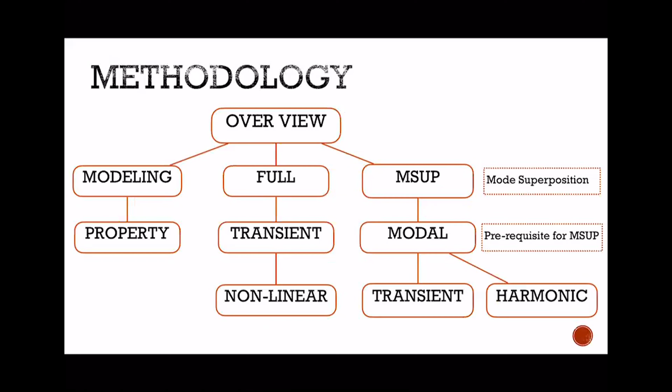The full method contains a nonlinear analysis of the statue-only model and the transient system, and the MSUP method contains modal analysis as the prerequisite of the transient system and the harmonic response analysis. Parametric studies were applied in both studies.

And then would be the modeling part. The modeling part is the process of building finer models based on Verdel's model. The picture here shows the Verdel's model are made up of coarse cuboid and overestimate the volume of the real one.

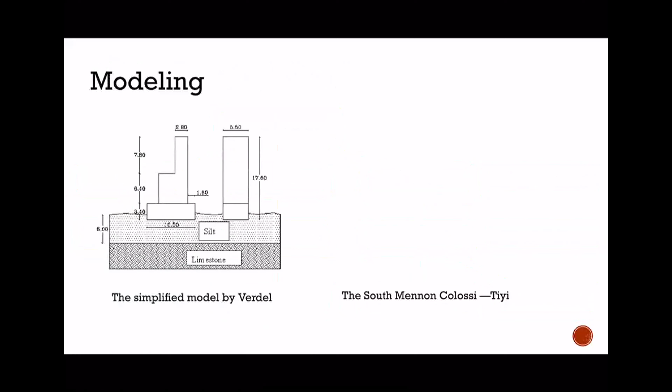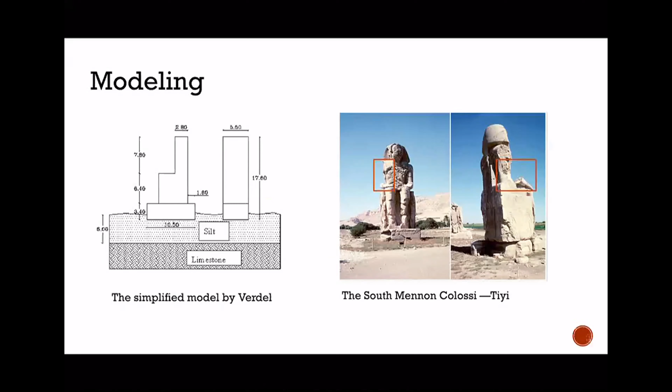After I observed the photograph of the real statue closely, parts of the statue are removed. You can see the red rectangle here. The right arm was removed, however the left arm remained. So I built a similar model to simulate the real one. The right arm is removed, and the left one remains. You can see the left shoulder here is a little bit wider than the right one.

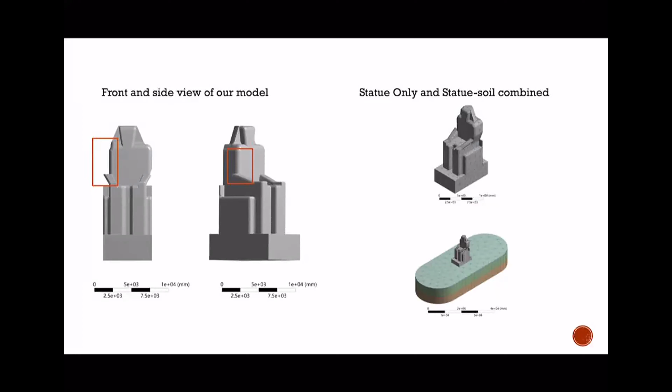Two models are built in order to make a comparison and to see the soil interaction on the statue, with the meshing size of 1000 millimeter. The statue calculation has its accuracy. The statue-soil combined model is divided into three parts, with the upper statue remaining the same. The lower part is composed of a 6m thick silt layer and a 5m thick limestone layer.

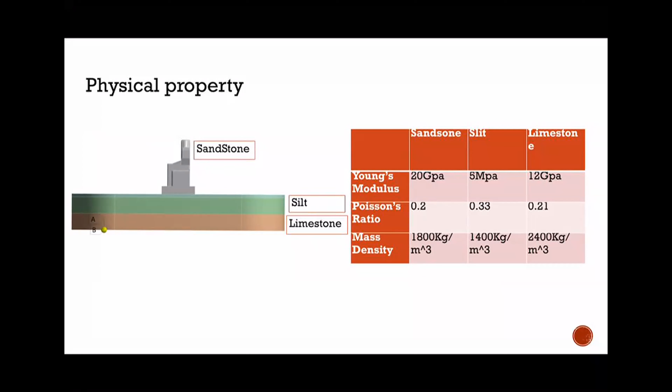Next part is the modal analysis. Modal analysis is used as a prerequisite to identify the natural mode of vibration. Each mode in the modal analysis refers to natural vibration characteristics of the mechanical structure, and each mode has its own specific natural frequency. The modal analysis aims to find the natural frequencies, which are the inherent properties of the structure. No load will be applied in the modal analysis process.

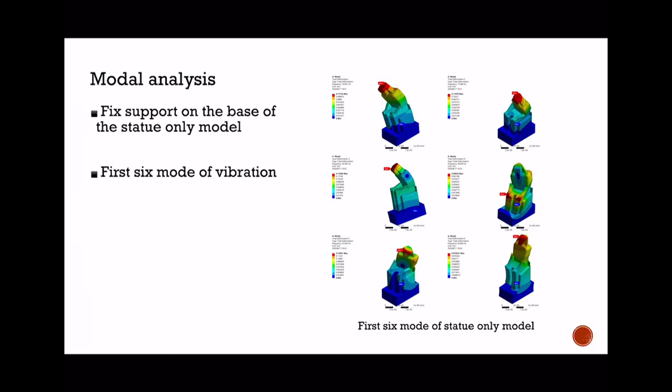Correspondingly, boundary conditions, like the fixed support in both cases, are applied at the bottom of the statue and the soil foundation. Here is the first 6 modes of vibration.

The next part will be the transient analysis in the MSUP system. Transient analysis contains a time domain, and we set the step end time for 2 seconds, with maximum substeps of 100 and minimum of 10.

For the boundary condition, we add a fixed support at the base, as well as frictionless support for the statue-soil combined model, and we add at the side of the soil to limit the freedom of 2 directions.

We're using the sinusoidal wave to simulate the real earthquake motion, and the fundamental wave is shown here: A sin(pi t).

We add the base excitation at the bottom of the statue. After that, we apply the parametric study to change the amplitude and frequency, as well as the direction, to see if there is any linear or nonlinear relationship.

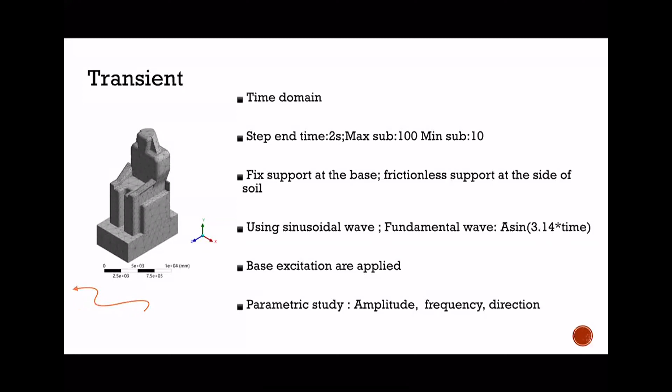The next part would be harmonic response analysis. Different from the transient analysis, it contains a frequency domain, and for the boundary condition, also the fixed support at the base. The minimum frequency just covers the first mode of the frequency, and the maximum frequency minus the minimum frequency is 1.5 times smaller than the interval of the modal analysis.

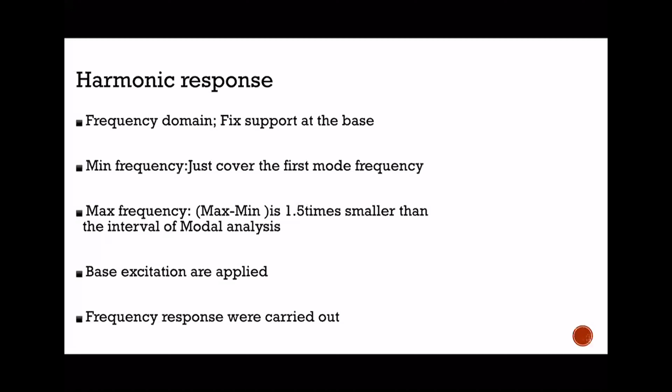Also the base excitation is applied at the base of the statue. And finally, the frequency response will be carried out to see the total deformation or stress given a frequency domain.

The final part is the transient analysis in the full system. In this analysis, we consider the nonlinear factor and also the elastic support between the statue and the base, with the stiffness of 100 Newton per cubic millimeter.

At the end, we will use the force convergence in the solution output to check whether the problem would converge. The next part would be the results and conclusion by Xiaokun.

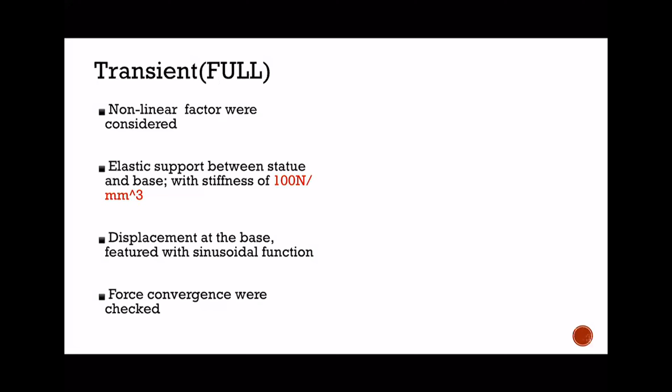Okay, so this is the results and conclusion part. For this modal part, I will show the first 6 modes of the statue-only structure and the comparison between the statue-soil combined structure. This guy here is a statue representing the statue-only structure, and this guy here is like a brick, representing the statue and soil combined structure.

In the transient analysis, we will show the results when we vary the statue's frequency, amplitude, and direction. We will do the same for the statue-soil combined structure and compare it with the statue-only structure. As for the harmonic response part, we want to see the response when the frequency changes, and whether it will blow up when the frequency of the displacement function approaches the natural frequency. The last part is the transient analysis, which will show the solution convergence and the sliding phenomena, as well as the comparison between full and MSUP system.

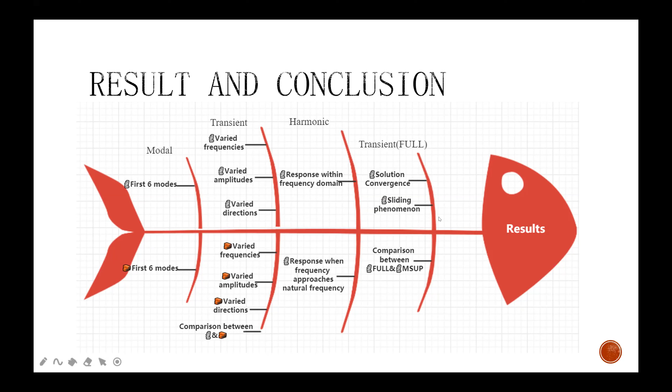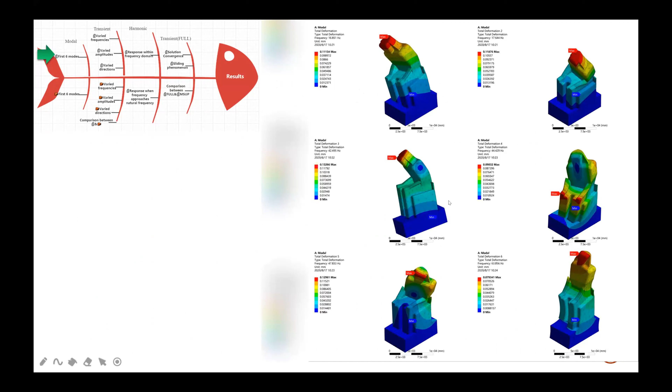So for the statue-only condition, we keep the first 6 modes. The first 3 modes, as you can see, are bended ones, the 4th and 5th are twisted ones, and the 6th is a stretched one. Each of them corresponds to a natural frequency.

This is the animation of the first modes of the statue, and also the first modes of the statue-soil combined. You can see they are pretty much alike, both bended. This is the 5th mode of the statue and the statue-soil - both twisted. And this is the 6th mode of the statue and the statue-soil combined - both stretched.

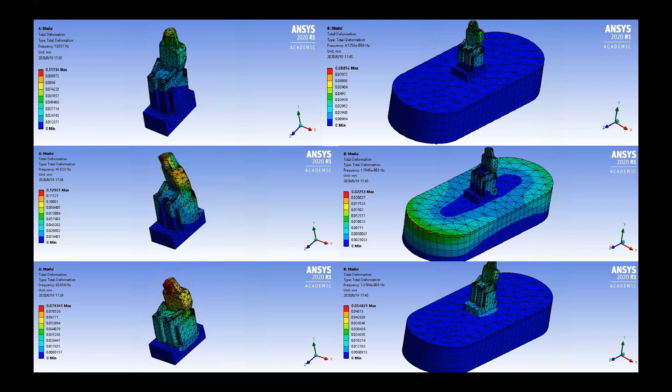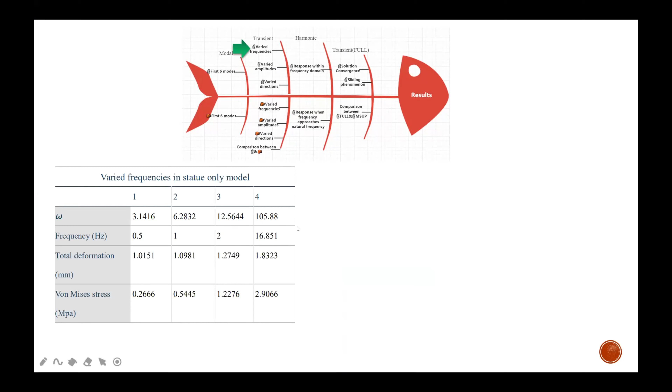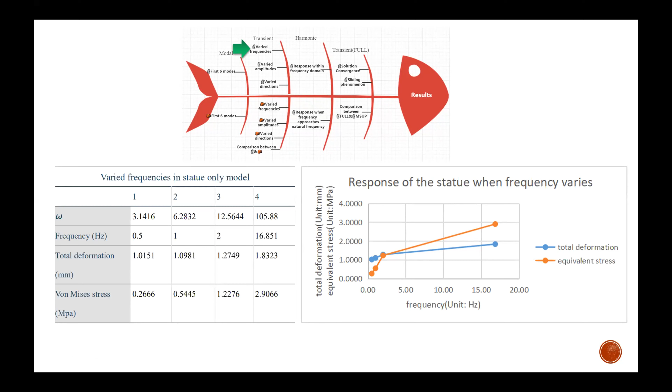This diagram shows that during the domain of 0.5 Hertz to 2 Hertz, as the function's frequency increases, the total deformation and equivalent stress of the sculpture increase in a linear-like trend. Though the total deformation and equivalent stress obtained from 16.851 Hertz did not conform with the slope before, it shows that the sculpture did not experience a blow-up as the frequency of the function approaches the natural frequency of the statue in this transient analysis.

This is the deformation contour when applying sin(pi*t) to the structure, and this is the animation.

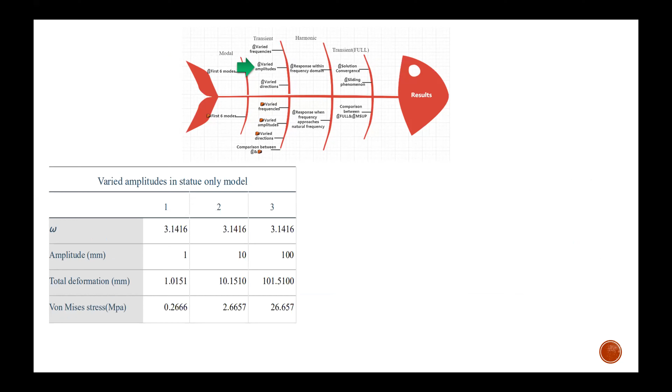Besides, we changed the amplitude of the displacement function from 1 to 100. The magnitude of stress and deformation on the statue are strictly proportional to the amplitude of the displacement function.

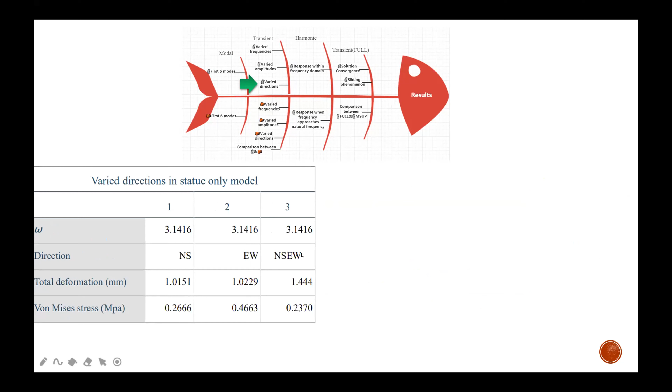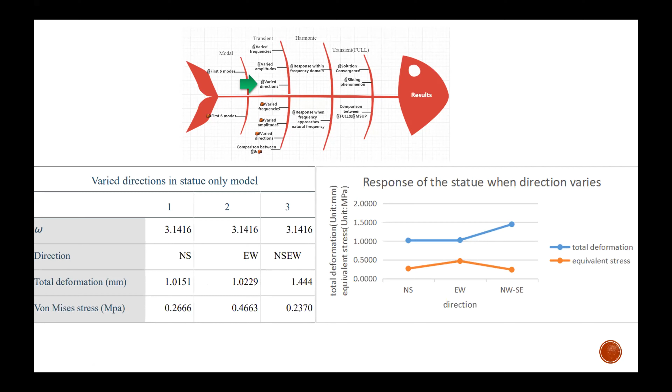We also applied different orientations with the function remaining the same, including the north-south direction, east-west direction, and the northwest-southeast direction. In NS and EW direction, the total deformations are nearly the same, around 1, while the total deformation of the NWSE direction is around square root 2, which is within our anticipation. When it comes to stress, the EW direction is the largest among them.

Same as we did in the previous analysis, in the statue-soil analysis, first we select the frequency, which is 0.5 to 2 Hertz. But this time, the acquired results are very different. The total deformation represents a linear decrement from 0.5 to 1 Hertz, followed by a horizontal line from 1 Hertz to 2 Hertz. We were unconvinced of the strange trend, so more frequency points were taken into consideration, which are 0.25, 0.75, and 8.

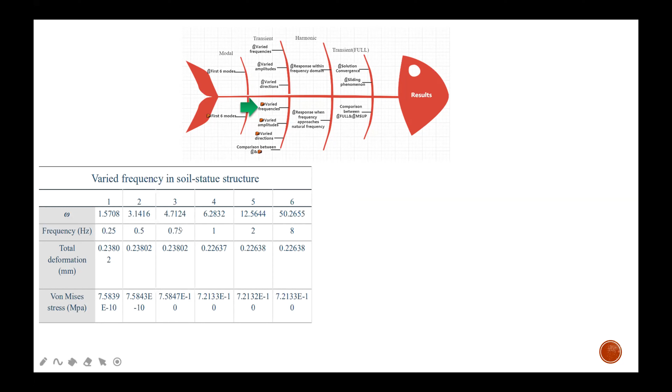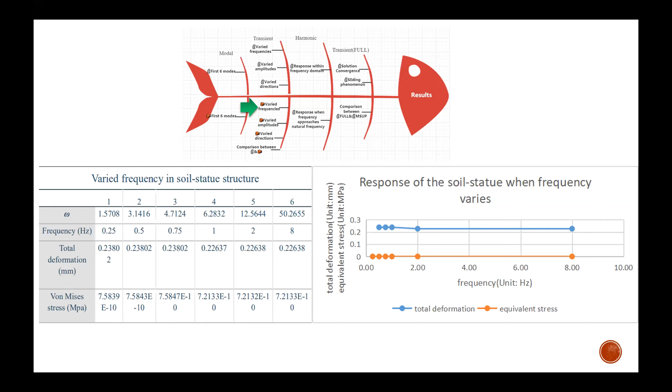It turns out that from 0.25 to 0.75, the total deformation remains a horizontal line, then with a descending period, and then continues with a horizontal line. As for the stress, since they're too close to 0, the trending analysis seems relatively redundant, so we just consider them as 0.

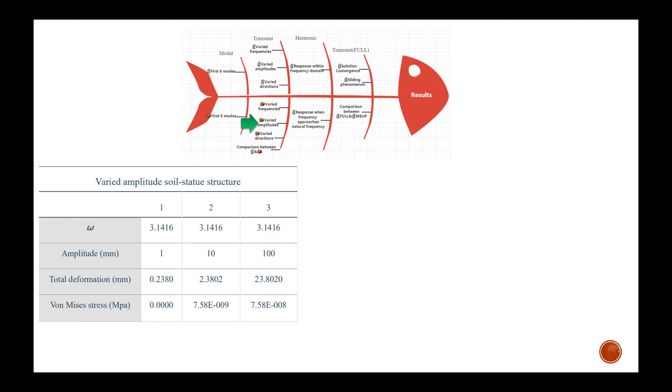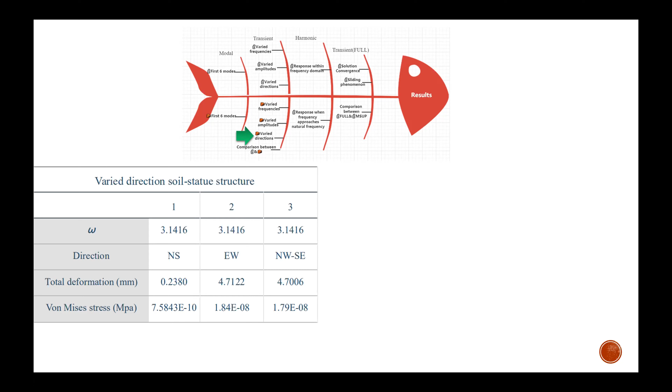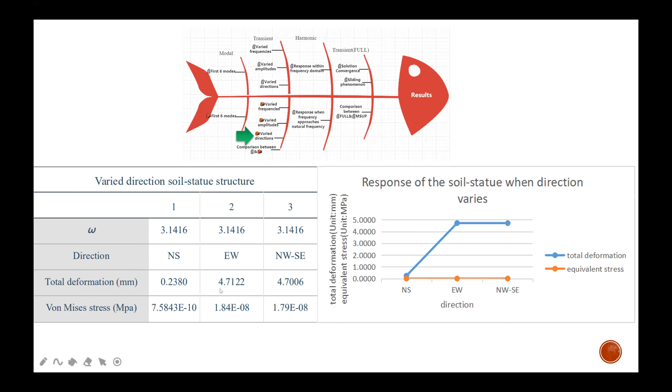The maximum deformation on the structure occurs when the seismic wave was applied in the EW direction, while the most moderate was in the NS direction. Note that when applying the EW direction function, the total deformation was surprisingly greater than 1, which is out of the anticipation we had earlier.

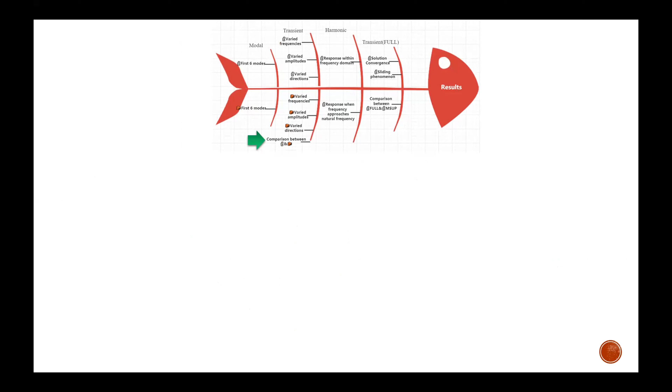If we compare the data obtained with and without the soil foundation, we discover several conclusions. Firstly, the total deformation and equivalent stress value of the statue, identically displacement function at the base, were dramatically smaller when considering soil as a part of the FE model. The deformation with soil was approximately 1/5 of the model without soil.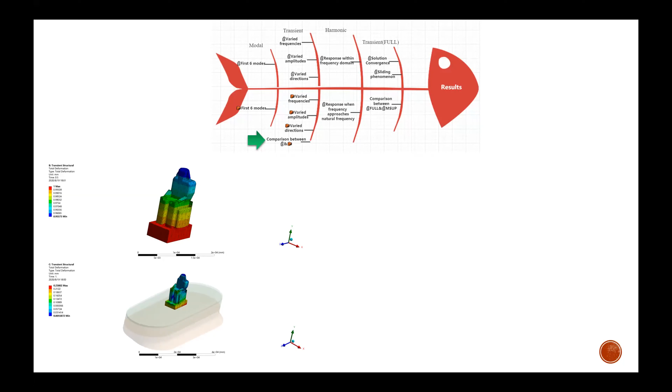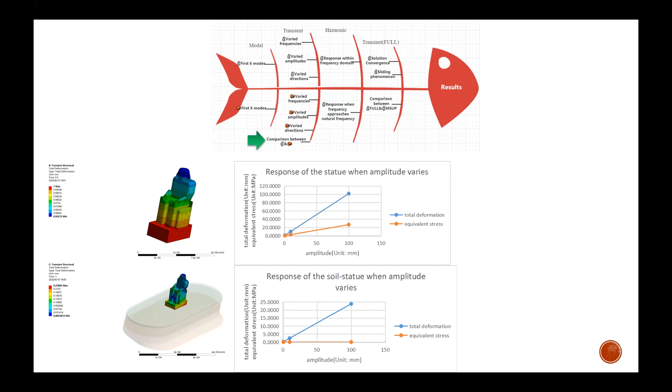Thanks to the contribution of the soil, the stress in the statue-soil combined model could be reduced to nearly 0 in all 3 directions, in all 3 cases of frequency, amplitude, and direction. Secondly, all results indicated that the total deformation and equivalent stress was linearly proportional with the amplitude of the seismic wave strictly. Thirdly, the deformation and the stress in the statue-soil combined model were proportional with each other on a particular direction, while no obvious relationship was observed between those quantities in the statue-only model.

In both cases, the minimum stress occurred at the NS direction, while the maximum stress appeared at the EW direction. Besides, it is out of anticipation that when soil was considered, the deformation in the EW direction was even 4.7 times larger than the statue-only model. We were so confused by it, so we made another circle soil model. The results changed accordingly, so we discovered the size and the shape of the soil may affect the results.

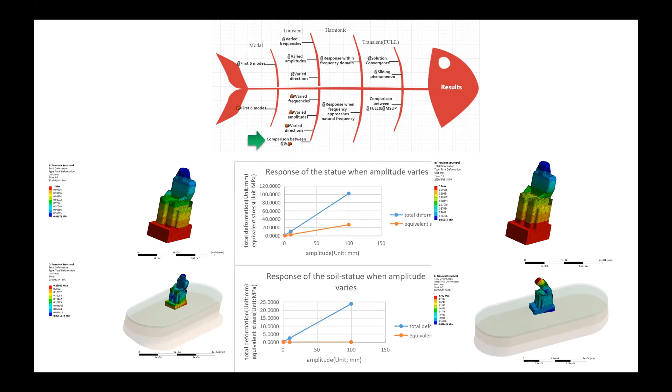In this harmonic response part, as the graph illustrates, when the frequency was 17.67 Hertz, which is close to the second modal frequency of 17.644 Hertz, the maximum deformation approaches 118. However, when the frequency increases past this period, the maximum deformation dropped to an ordinary level. You can imagine if it comes across another natural frequency, it will just rise up again like waves.

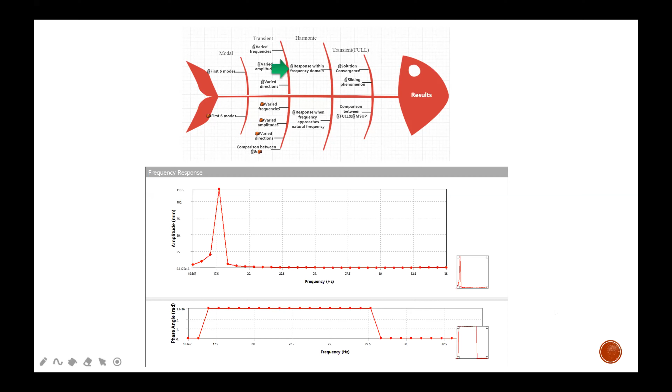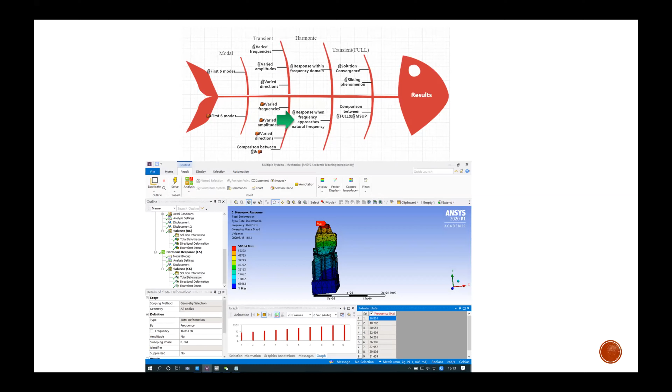The excitation frequency was then set to 16.851 Hertz, which is the first modal frequency, and its maximum total deformation was approximately over 58,000. We could therefore conclude that resonance could result in a significant level of deformation and could lead to serious damage to the structure in this harmonic analysis.

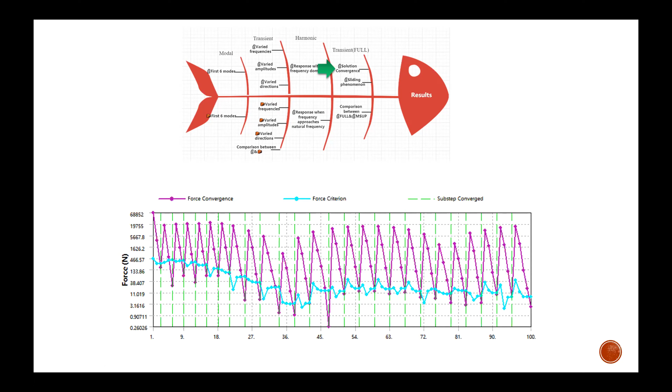Then we observed sliding. The next part is the transient analysis using the full mode method. These results are very easy to diverge, so we use the force convergence in the solution output to check if the problem diverges. In this picture, those green vertical lines and the absence of bisections clearly illustrate that the problem is converged. We then observe the sliding phenomenon when the displacement equals sine 2 pi t and 10 sine pi t. We can conclude that under a certain value, like increasing the amplitude or frequency, the statue will start sliding and lead to further damage to the whole structure.

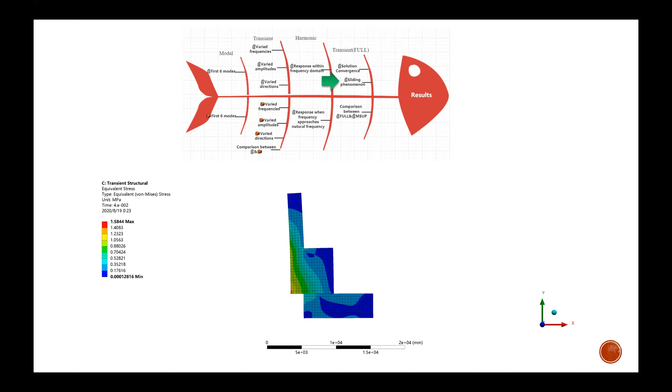The picture here is auto-scaled in order to see the sliding phenomena. Actually, it slides much less than shown on the graph because it is auto-scale. And this is the animation of the 3D sliding.

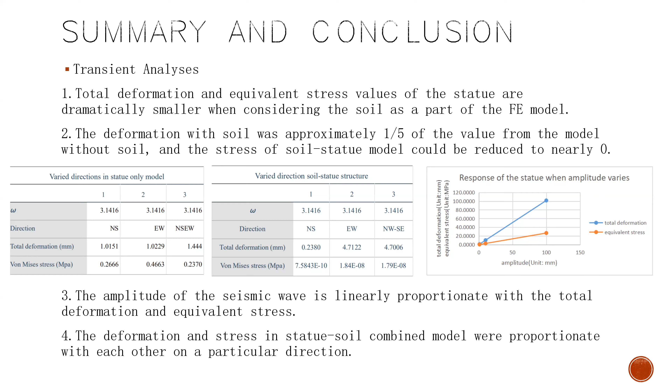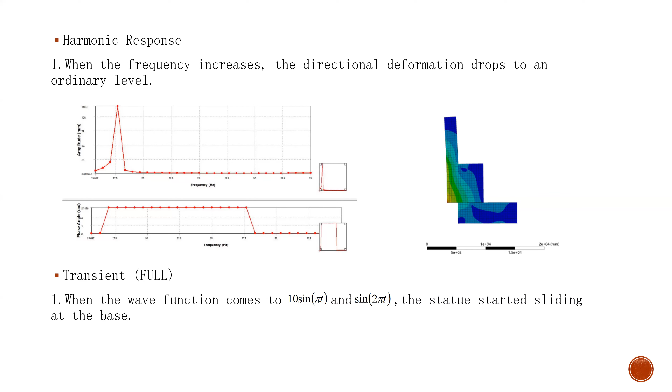And the next part is our recommendation for future work. First, we can solve nonlinear problems, because in this research we considered some situations were linear, which can be too idealistic for the real situation.

And we also can use a different shape and size of soil foundation, because this time the soil foundation we use the shape of it is just like a playground, and maybe we can try a circular foundation if we have more time.

And we also can apply a more realistic seismic motion with a more appropriate step time and boundary conditions, because a real seismic wave is not like a sinusoidal function. And we also can develop a method to distinguish under what deformation the statue will topple.

And the last point is we can find some repairing methods for the Colossus according to the collected response, to avoid the collapse of the Colossus when it experiences an earthquake, and not damaging the surface and structure of the whole statue at the same time.

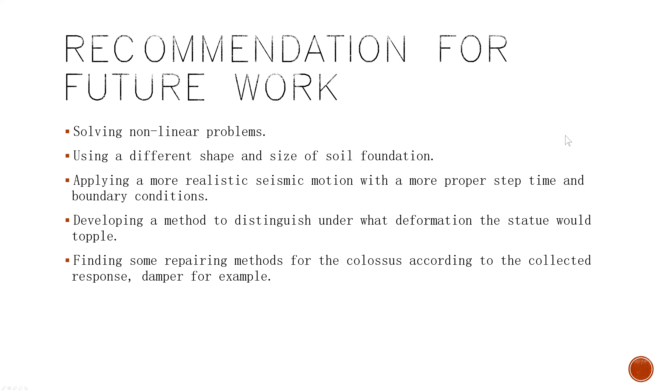And the final part of our presentation is an acknowledgement, for we received a lot of technical support and theoretical support from Professor Borja, T.A. Blair, and Cindy, and we quite appreciate that. And that's all. Thank you.

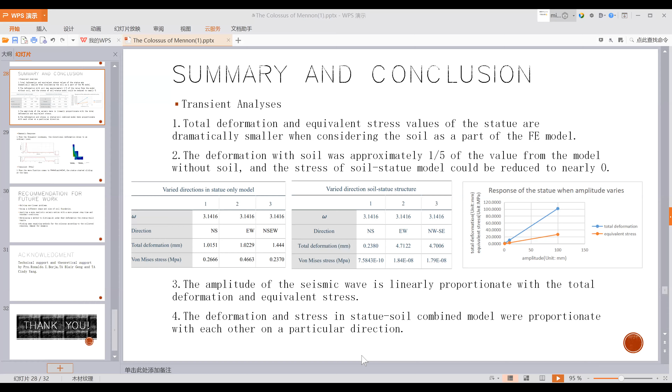Thank you. Very nice. All three presentations, very impressive. I have a couple of comments regarding the problem, not the presentation, but the problem itself.

There is a thing called site amplification. So what it means is that depending on the material properties of the soil, if you apply a certain earthquake excitation at the base, you could either amplify the motion to the ground or de-amplify it. So it's not always the case that the motion will be de-amplified. It really depends on the combination of the characteristics of the earthquake motion and also the material properties of the sediment. So in some combinations, maybe your deformation at the statue will change.

Now, if you add the statue in there, the modal characteristics of the combined structure will generally change. So it is not sufficient to do a site amplification analysis without the structure. So what the group has tackled is a very, very complicated problem.

Now, the second point that I'd like to make has to do with the fact that when the structure undergoes seismic excitation, then it vibrates, and there are waves generated that go away from the structure. And then they move toward the boundaries of your finite element mesh.